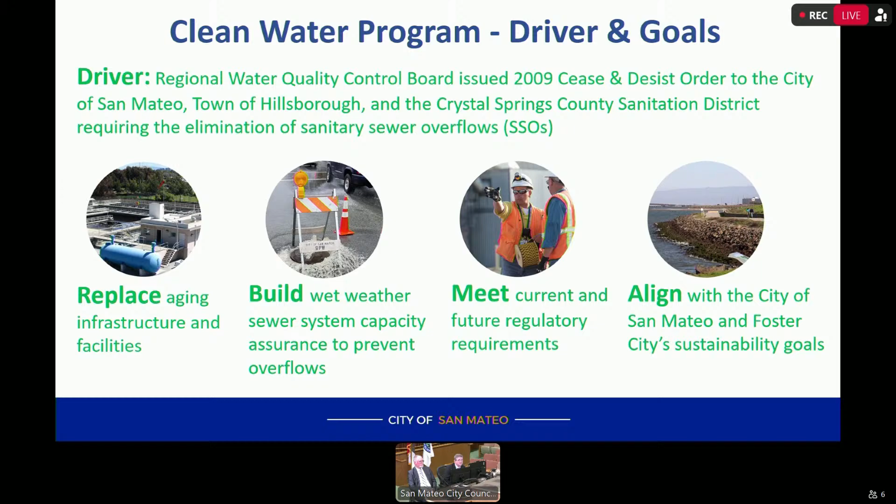So the agenda is pretty simple. We'll talk about the Clean Water Program overview and update. I'll give you a little bit of background of how we got started, where we were, and how we're landing now. So in the beginning, the Clean Water Program's driver was the cease and desist order from 2009, a long time ago now. We were going to replace the aging infrastructure, build wet weather capacity, meet regulatory requirements, future and current, and then align the City's and Foster City's sustainability goals.

And this is a really, really simple timeline. We got started back in 2015 with the program, construction on the plant in 2019, and then our other big project, UFES, in 2020. Now all those things are coming together here in 2026.

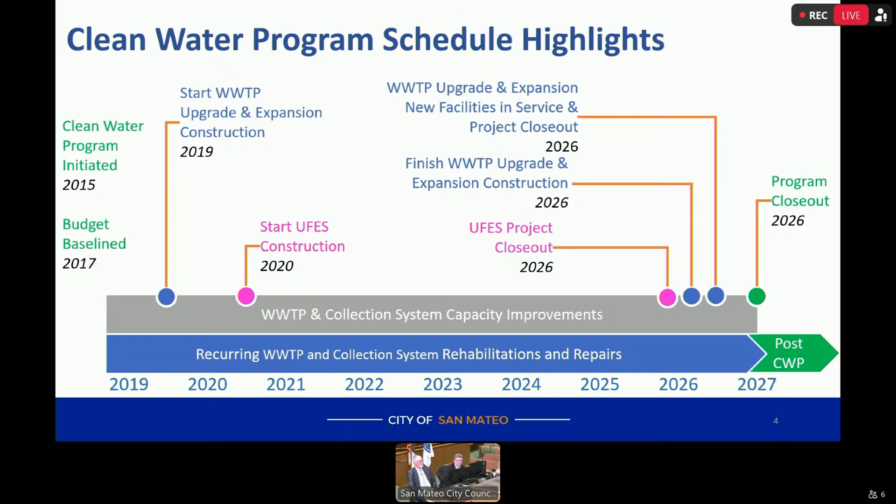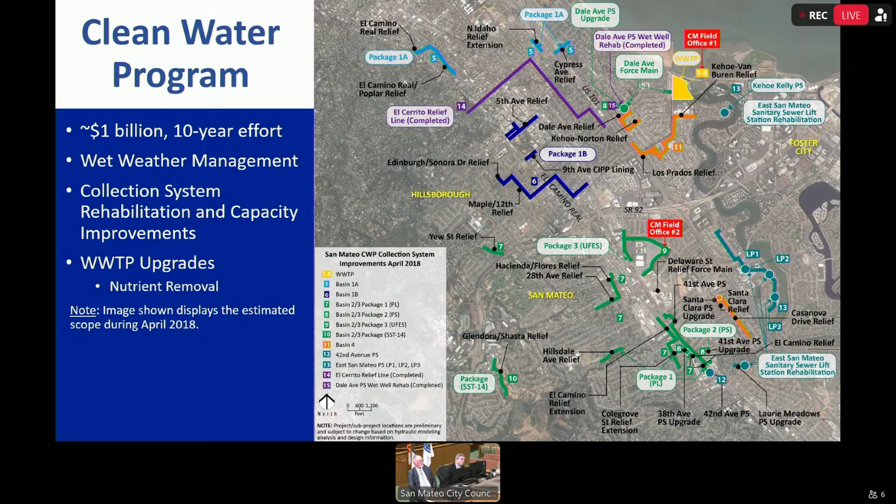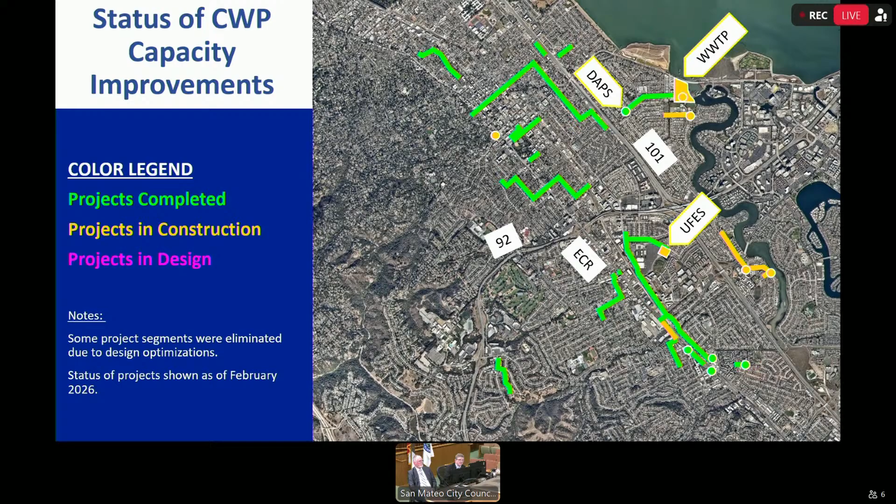And here's where we are. We've completed almost all of that work. Now we only have the remaining work at the treatment plant, some finished work at UFES, a small amount of line work on ECR, and we have the final pump stations. We're renovating 3 pump stations as the last project.

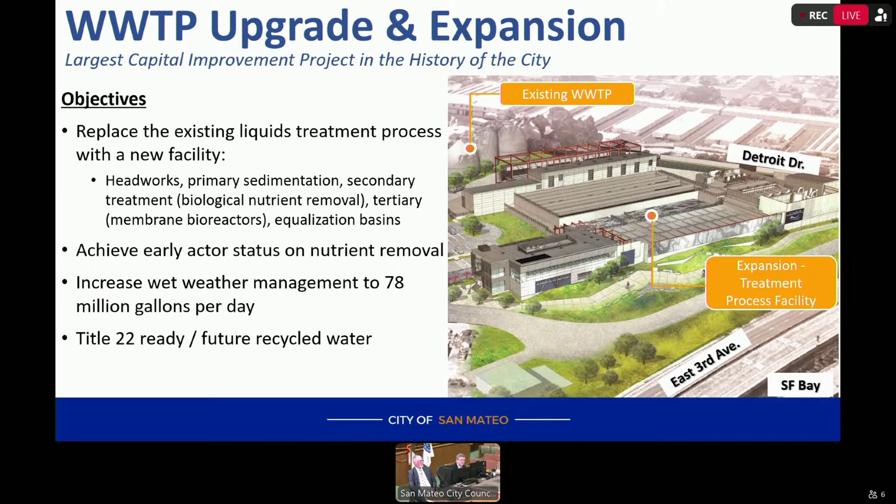So the original objectives at the treatment plant were to replace the liquids process. The liquids process was going to be improved to meet regulatory requirements and treat the wastewater flow in wet weather, which is up to 78 million gallons per day. We wanted to achieve early actor status for nutrient removal, anticipating the nutrient removal mandates that would come in the future, and also be ready for Title 22 recycled water.

The plant location, as you all know, is next to the original treatment plant on Detroit. Back in 2020, we initiated work, and this is a shot of the excavation and foundation work as we got started. And now we're doing the polishing work on the finished treatment plant.

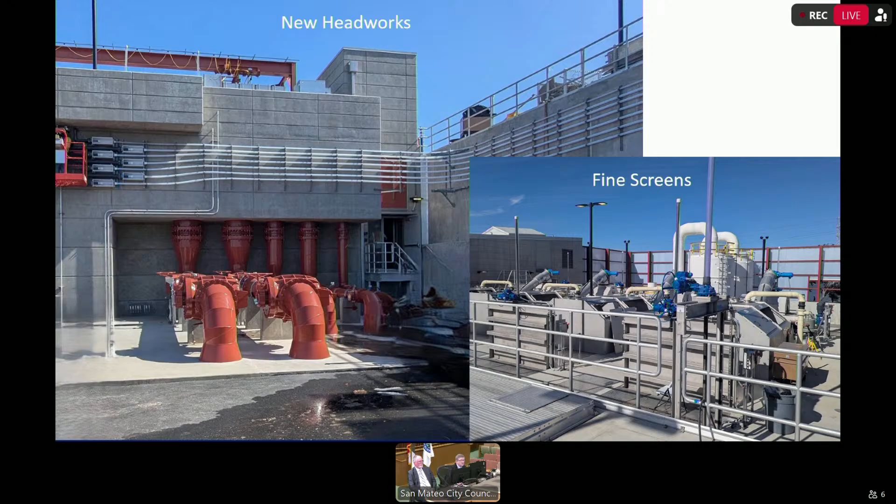We got a new headworks. The old plant didn't have a headworks, so all of the debris and grit that came in from the sewer made its way into the treatment process. Now we have a headworks that screens that and removes it at the front end, improving the overall process.

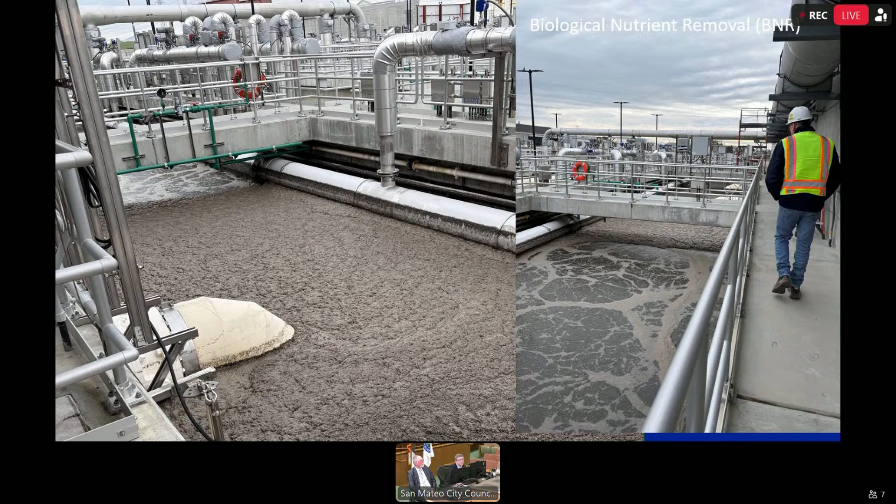And then the membrane bioreactor, and toward the end of the presentation, I'll show you what great results we're getting with that.

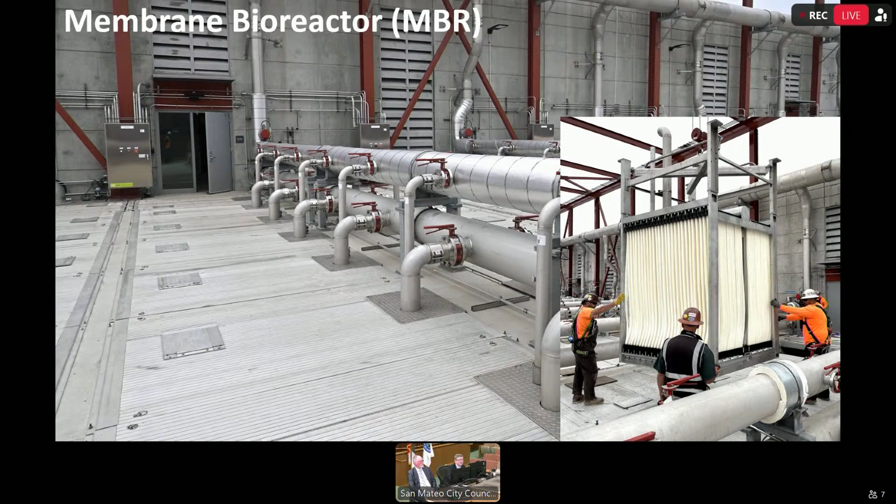And then the BioActiflo. The BioActiflo is the process that allows the plant to operate at a very high rate in the wet weather months, treating that combined stormwater and wastewater that ends up infiltrating into our sewer system.

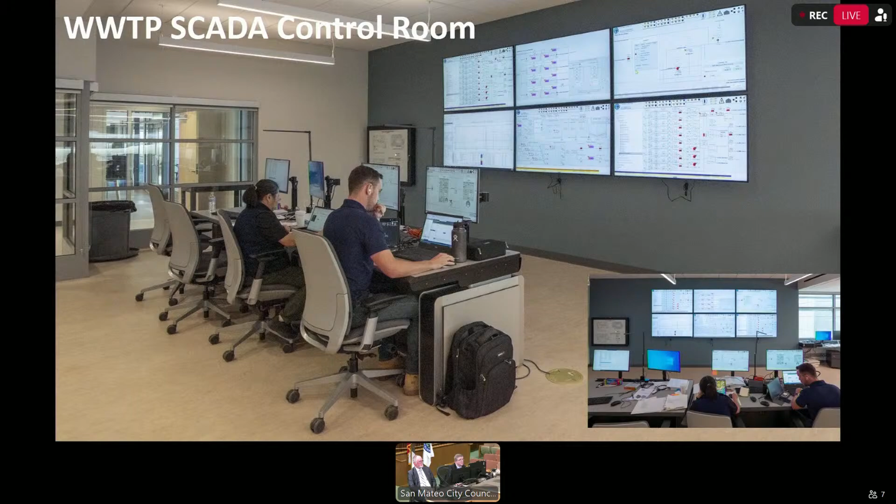We got a modern control room now as part of this new plant.

And in September, we had the official ribbon cutting. The plant was mostly complete, but the processes weren't totally done, but we had a great celebration.

We have a nice new administration building that's got a state-of-the-art lab, the control room, facilities for meetings, training, offices, and the operators. So what we have now is a treatment plant, state-of-the-art, capable of producing a high-quality effluent, and it's very attractive.

So here's an example. On the left side, we have the wastewater in the BNR process, typical wastewater. And then on the right side, that's the result - that's what the membrane bioreactor, the MBR, can produce. It's very, very impressive.

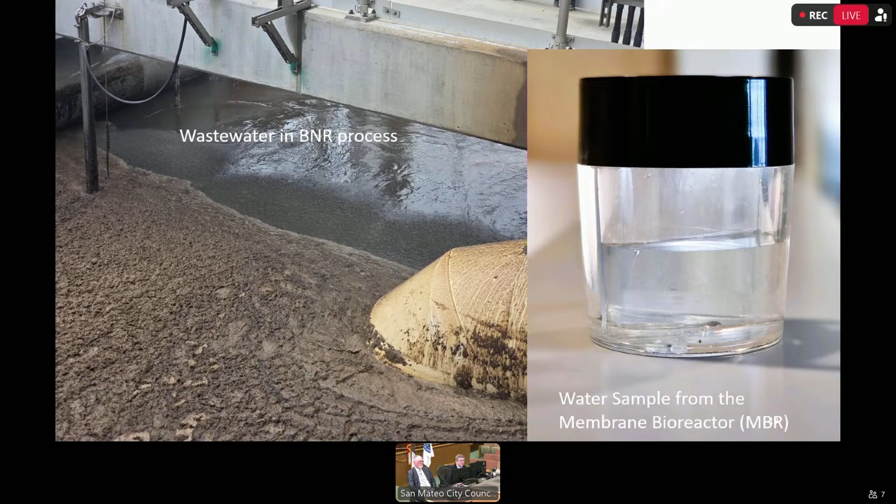And here's a comparison. We have the existing effluent on the left - that's what the current treatment plant produces and sends to the bay. Now the center beaker contains the BioActiflo effluent - this is the effluent they're producing at that high rate of treatment in the winter. But on the far right, that's the MBR, that's the filters, and that is producing that really clear beaker - really impressive.

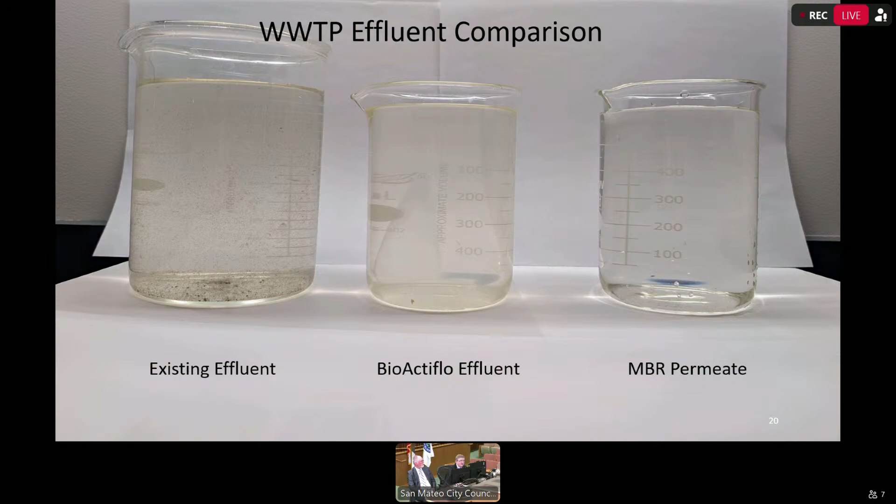So let's talk about the bottom line for a minute - that's what we all want to hear about. We projected in 2017 that we'd spend $991 million. Well, that's what we budgeted.

The current estimate at completion is $1.035 billion, which is about 4.4% more than what we had projected in 2017. You can see on this chart, we won't go into great detail, but some things went over, some things went under, but we had a really, really good result.

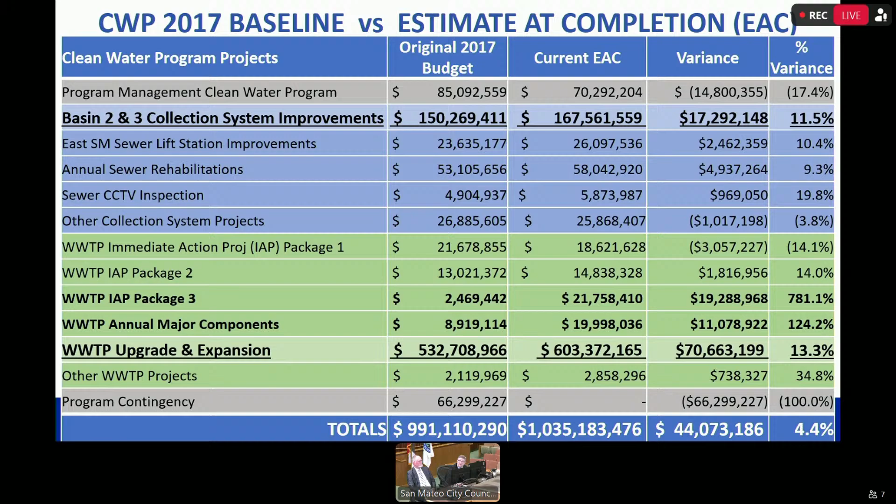So where we're headed now at the treatment plant is we're at that final phase. The treatment plant is almost fully operational. Soon it will have all the flow necessary and the old plant can be taken offline. But we do have some final projects and final things to negotiate or tasks as part of this.

So what we are projecting is that above the owner contingency, we'll need $3.85 million for hard constructed things at the plant and about $2 million of soft costs associated with that.

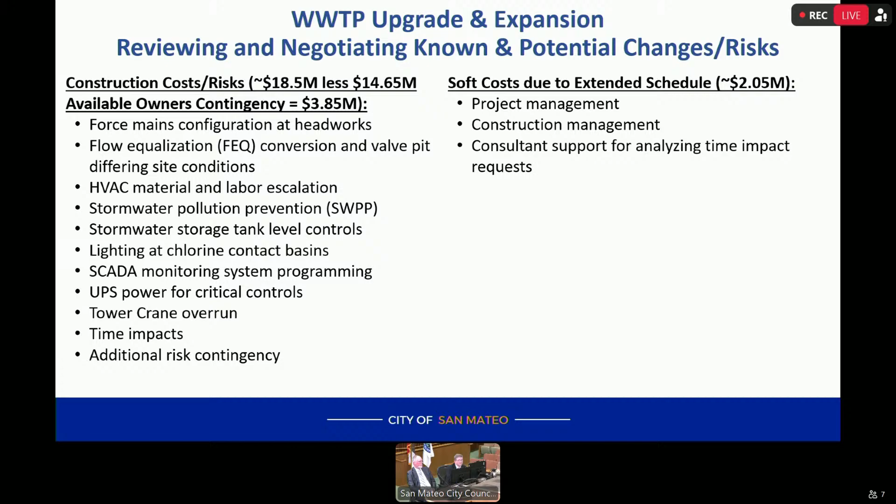Now, this is just the plant. So this breakdown shows that we have a potential - and this is a potential depending on whether we negotiate down some of those extra costs that we're projecting. We have about a 15% contingency on the plant, which is a good figure for a project of this size, this complexity.

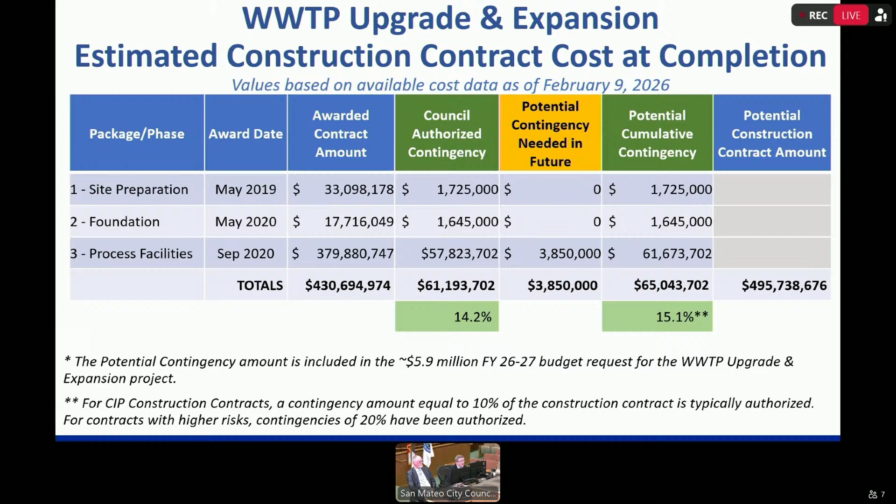So upcoming milestones: the plant performance testing is currently ongoing. The new processes will be operational this month, and the final force mains should be cut over this month, meaning the plant will be receiving all the wastewater intended for it.

Following that, the big project left to do is to convert the existing aeration basins. They'll be taken down and converted to an equalization basin to give the plant capability of holding some flow to catch up in those wet weather events. The remaining site work should also be done by this coming May, and we expect the project to close out by June of this summer.

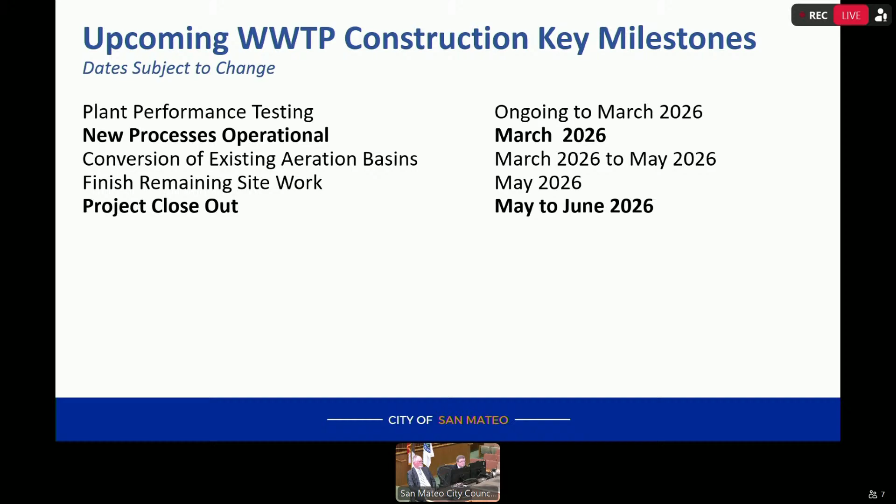So in the wrap up of the Clean Water Program, the plant will be completed this summer. We will reopen a very important thing to the neighbors, the recreational path that crosses the plant property. This is something we've all gotten a call about - the neighbors all want the path back, so we should have the path restored by this summer. There'll be some other minor projects toward the end of the year.